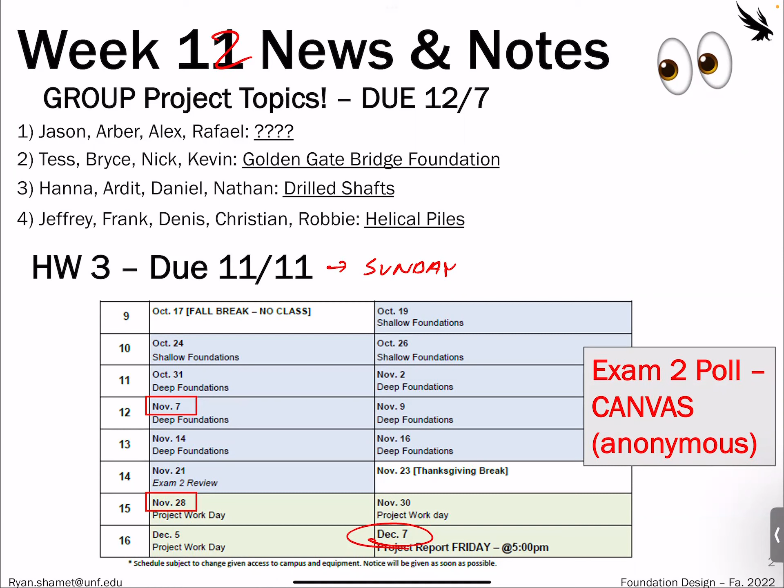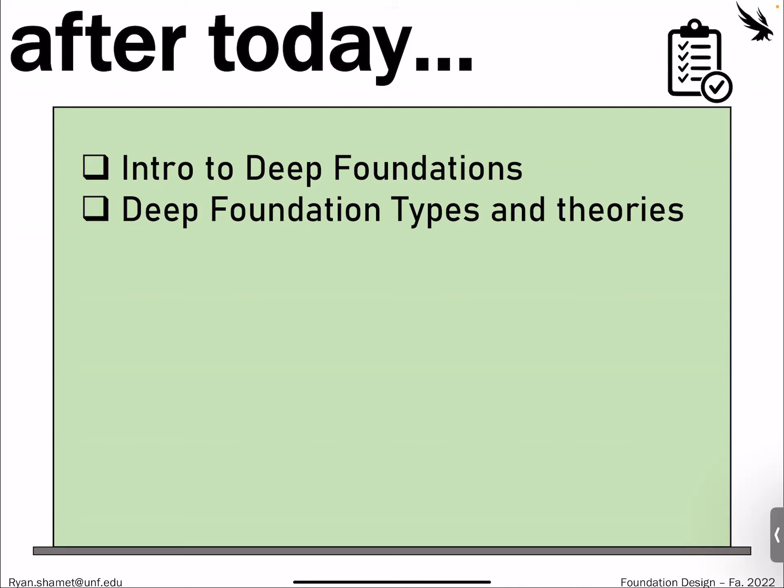Okay, so we're going to introduce deep foundations. Today is going to be a little bit more conceptual. We'll talk about the different types of foundation solutions for piles, and then the different theories based on that. And then we'll get into the fun old equations similar to the bearing capacity equations as before.

Just to recap some things again, for shallow foundations, the capacity or strength we talk about is the bearing capacity. And the way we show this is qu. So although we have input factors based off the shape of the foundation and the depth of the foundation, this lowercase qu is technically a soil strength value. This is the capacity of the soil, the bearing capacity of the soil.

What are the 2 methods that we talked about for bearing capacity? Terzaghi. What's the other one? It's not a guy, it's a super long acronym. Yeah, AASHTO method. Those are the 2 standard theories. The reason I'm choosing these 2, because there's more out there, is that these are the ones provided in your FE handbook and your PE handbook.

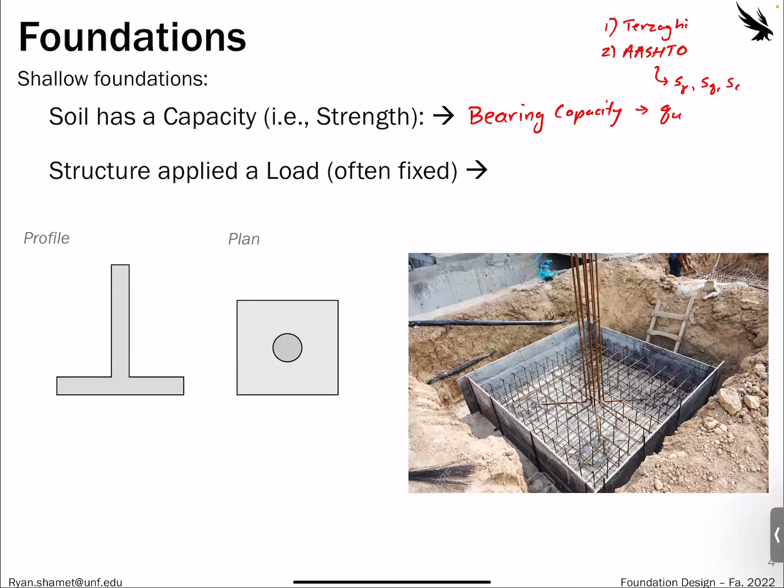So for whatever reason, they use these two. Does anyone remember the difference between the two, or what's the main thing that AASHTO adds? Yeah, shape factors. There's these little S's, like S gamma, SQ, and then SC. So both techniques still look at bearing capacity in terms of three factors: the cohesion, the unit weight, and the surcharge. So there's those three separate factors, and each one has an N, a bearing capacity factor.

These are called bearing capacity factors. The tricky thing is there's Terzaghi bearing capacity factors and AASHTO bearing capacity factors, and both of them still use the same variable, N subscript C. There's a table with N subscript C's for Terzaghi, and there's a table for AASHTO, same variable. So make sure you're choosing the right one.

So we went over an example last class about this. There's two ways you can look at using bearing capacity: you can find the bearing capacity of the soil and then check it against the applied bearing pressure from the foundation, or you could find the bearing pressure from the foundation and then design the value based off of a required loading.

This is like knowing that we have a structure load applied, often fixed, such as capital Q, which is a force. Usually by the time the geotechnical engineer is working on creating this foundation, the superstructure is already pretty much set. The structural engineer knows that the column is going to apply a 100 kip load or something. So then it'll be your job to design the actual footing size, the footprint of it.

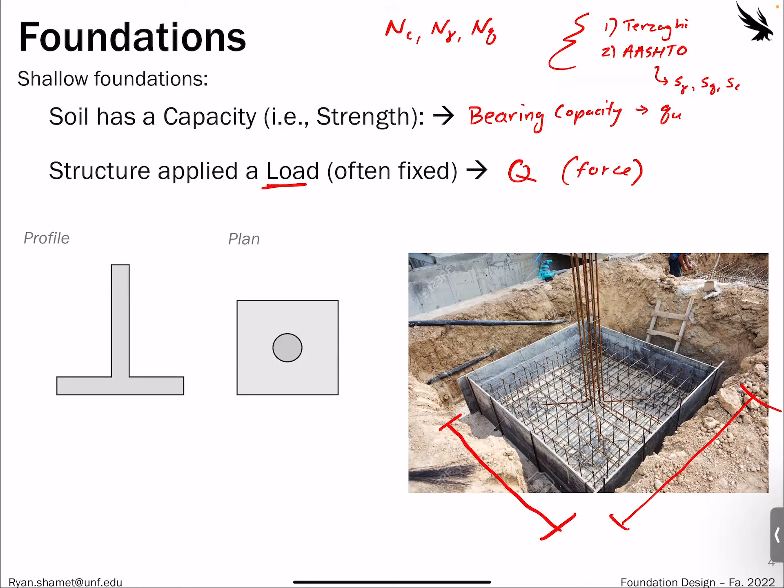So there's different types and sizes of footings, with different footprints. Again, what we're trying to look for is the soil strength, the Q ultimate, to be greater than the applied stress or bearing stress, which would be Q divided by A. So we would find the bearing capacity based off of an assumed shape, length, width, depth, or base. And then we would check that with our applied stress and cross-sectional area to see if that value actually works, and redesign it if it doesn't.

Eventually, though, you'll see there's a point where there's not enough footprint or area available. So you would be calculating the bearing capacity of the soil, and you'd know the Q load and the required cross-sectional area. You could say our site is not large enough to have this footing, and in that case we would need to use a deep foundation. Can anyone else think of another reason why we might need to use a deep foundation over a shallow foundation?

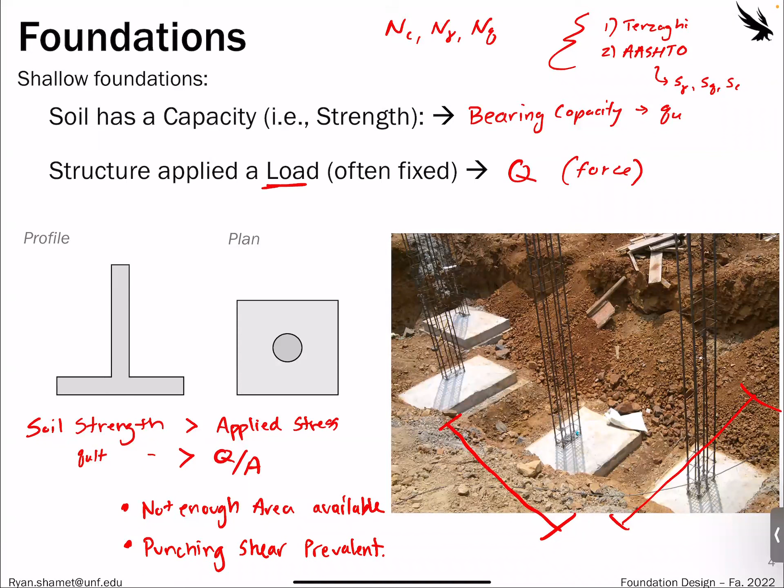The type of soil you have on the very top couple layers. Yeah, you might need to drive it down so you have stronger soil to support the structure. So technically that would be if punching shear was occurring, so punching shear prevalent. If you have a weak soil on top, or low density soil, or undesirable soil like organics, then you would need to push that load to a deeper level.

For that, we use piles, drilled shafts, caissons. These are all types of deep foundations. Essentially, with a deep foundation, a way of characterizing it is just anything that's not a shallow foundation - it's where the depth or length of whatever it is is much greater than the width.

Another way of thinking of this is that instead of transmitting the stress horizontally across the soil, we're transmitting it vertically. The footprint before, that area, is a cross-sectional area of a horizon or plane around the surface. But for a pile foundation, we transfer it vertically through friction and a little bit by end-bearing loads. Most of the time, a shallow foundation is the preferred way for typical structures, and deep foundations require more work, testing, and uncertainty, so they're mainly only used for high importance projects or when soil is really poor.

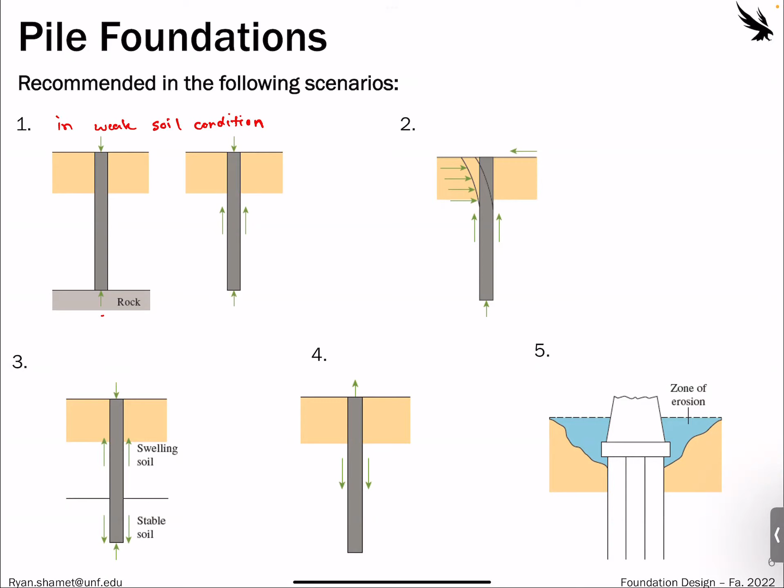So the following are also some recommendations for pile foundations. Not only can the soil be weak, like in weak soil conditions where we need to transfer the loading to a stronger stratum, like rock down below, but pile foundations are also used for carrying lateral loads.

If we're assuming the connections are all rigid, a deep foundation will lower the center of gravity of the entire structure by extending it below ground, so it'll be able to withstand lateral loads a little better and not have as high an overturning moment.

Another reason is expansive or collapsible soils. In some areas in the US, like Texas or Louisiana, there's clay that can swell whenever it becomes wet. During flooding seasons, it can actually push up structures, so a deep foundation is pushed down to more stable soil. That way the soil above it can rise and fall without putting stress on the superstructure and causing tilting.

Another reason might be to resist uplift. This is for tension piles, like helical piles some groups wanted to work with. It's essentially like a screw that resists uplift in case of overturning, similar to tension wires on big cell towers, like the one by Jag Stadium.

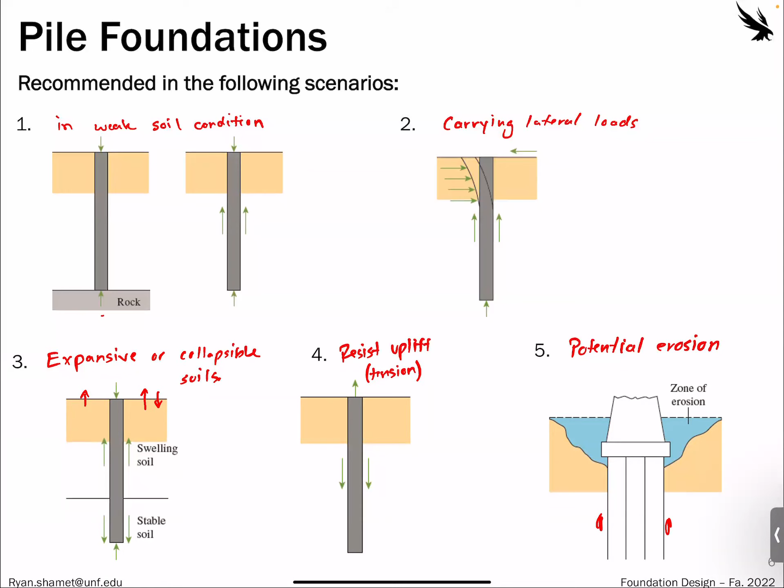Piles can also be used for construction purposes, not just structural loading. One example is soldier pile walls, used for retaining walls. Essentially you have H piles or W members, usually H piles.

That's really helpful because these are also often temporary. These H piles, since they're spaced well together, can be vibrated in and then vibrated out. You install them, stack the wood, and fill it up behind. Whenever you're done with the temporary retaining structure, or switching the road around, you can take the wood down and vibrate the piles out, since they're not as deep as conventional piles.

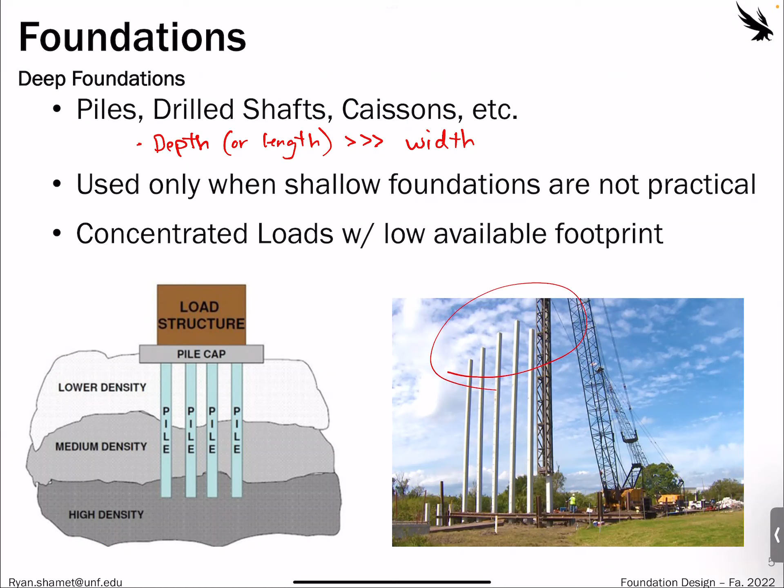This is a video that talks about the pile driving for the I-4 Ultimate project, which is pretty interesting. Most of these pictures are taken from there. They beat the world record pile driving length with spliced piles.

And with the I-4 project and their new project too, that's the Wekiva Parkway project. If you want, you can just Google Wekiva Parkway. Actually, in a couple classes, I'll show some geotech reports for this.

In this area, there were so many potential sinkhole problems with this, where the road was going, that one pile would cap out, like hit limestone at probably 100 feet. And then they'd move over like 10 or 15 feet and the other pile would cap out at like 300 feet. So the deepest single pile in the state of Florida is in Orlando for I-4 Ultimate. I think it was like 440 feet in depth.

Because once they start driving the pile, they're like, alright, we're just going to keep splicing it and keep adding on to it until we reach that resistance value that is designed for. So it can get really expensive really quickly material-wise, because you could design for one thing, but then once you start actually constructing, you have to wait until you reach that actual driving force.

Different types of piles: timber piles, these are just kind of a standard, concrete, steel, and composite. We'll be focusing mainly on concrete and steel, but timber piles you can still come across. Composite piles are now starting to be more popular too, for high strength.

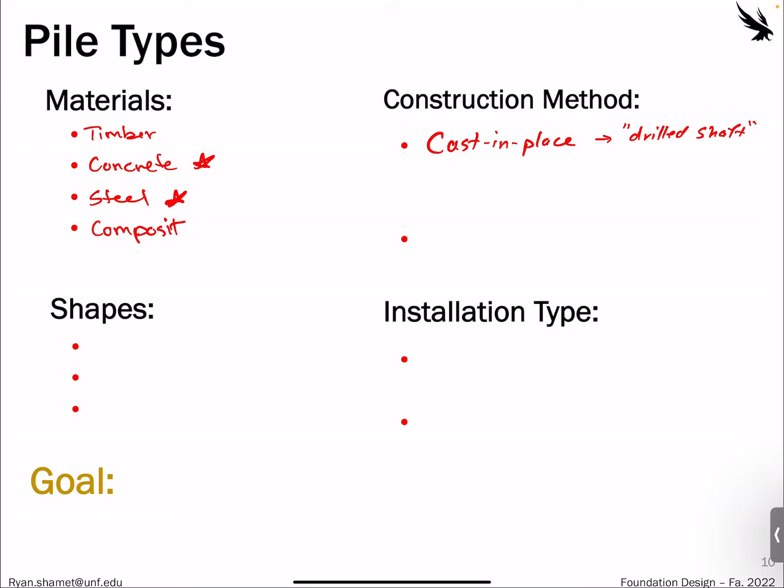So for construction methods, there's different types. There's cast in place. This is usually what we'll refer to as drilled shafts, but depending on who you talk to, some people say it's like a size requirement. Essentially for cast in place, you drill a really deep hole, you put some method of retaining the soil, like mud or some type of casing, then you lower the steel reinforcing rebar into the hole, and then you fill it with concrete. So that's casting in place, you're literally casting the pile in place.

The most common kind is going to be precast. That's the opposite: you're casting the pile beforehand in the yard, at the precast lab or whatever, then bringing the piles on massive semis and installing them at the site. Is there a depth where you switch over from one to the other?

Precasts are better for deeper depths. It's going to be more so loading potential and the soil type too. Cast in place is usually really good for end bearing because they're larger.

Usually the friction is hard to actually design against because you have some type of system to keep the sides of the hole open. For precast piles, you can do designs and make sure that the friction of the concrete or steel is sufficient. So when you're driving it, you're essentially testing the loading as you're driving it, like pushing it in. So precasts are usually for deeper applications.

Or it's like a loading or a soil scenario. So, like you said, in Orlando, a 300 foot drill down - you're not going to have a 300 foot beam. So would they just cast multiple? Would they have multiple beams and then tie them together?

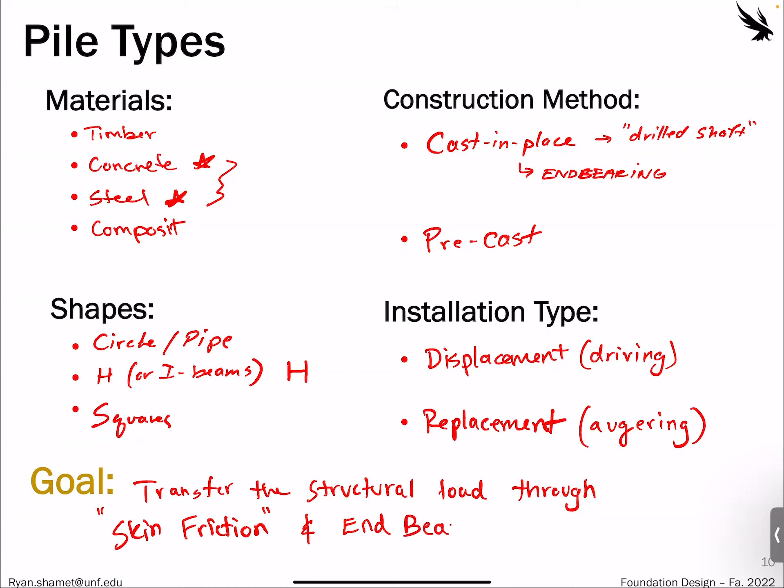So when we start doing calculations here, you'll see most of the time the capacity of the pile is going to be taken from the skin friction - so the actual vertical interface, like if this is the pile, the actual friction along the outside of the pile with the soil. Most of the capacity is going to be that, but there's also some capacity here at the end as well.

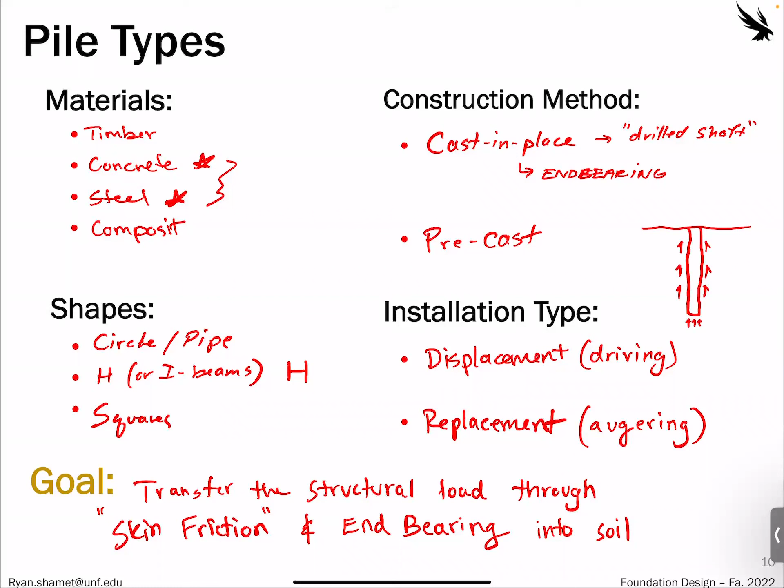Okay, so for steel piles, these are usually, most of the time for structural components, going to be pipe piles or rolled steel H piles. So you can see those are H piles - these can be whatever size you need them to be. Usually this is where drilled shafts are also going to come in, or suction caissons are going to be these as well, like these larger diameter and larger thickness steel piles. Typically for pipe piles like this, we'll use 24-inch pipe piles, which means the outer diameter is 24 inches or 2 feet in diameter - that's like the standard for FDOT.

And the good thing with these is they can be both driven or vibrated in.

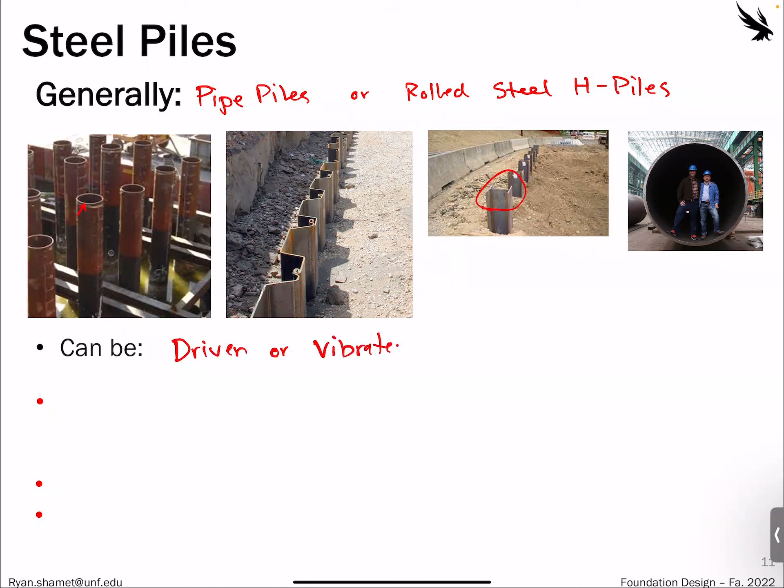So I mentioned before H sections, that's like the structural section here, these H piles. This is preferred over other types of like W sections or I sections. And the main reason is because the web thickness is equal to the flange thickness.

If we remember from mechanics of materials, or if you took steel design, if we have something like this, we would usually call it a W member or wide flange. Your steel manual has all the different section properties. This is going to be the flange, so there's two flanges at the top and bottom, and then the web in the middle. For an H section, that flange thickness is the same as the web thickness.

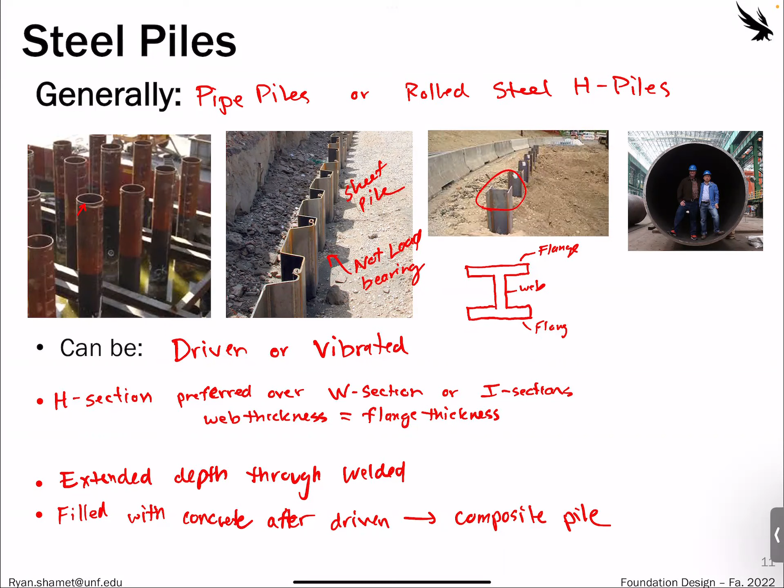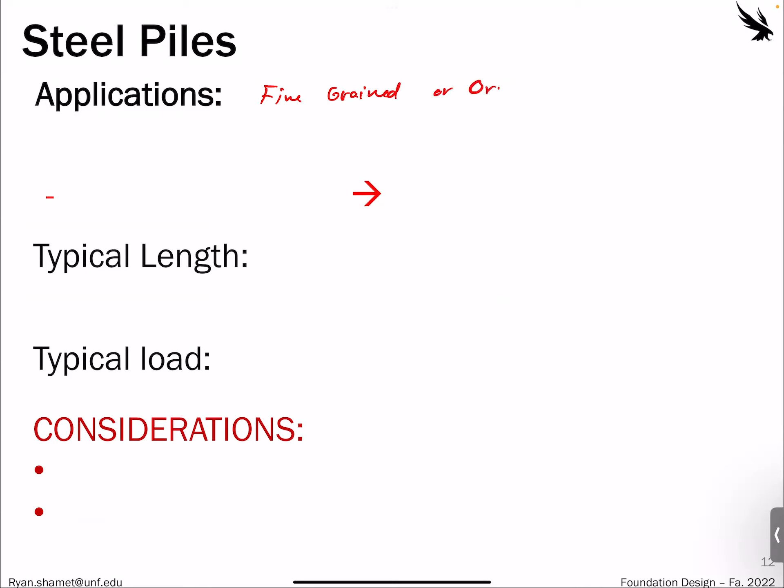So for steel piles, the application, most of the time these will be for fine grained or organic soil. Now it doesn't need to be, but think about it: if you had a sheet of steel and a thing of concrete, which one would be smoother? The steel would be more smooth, right?

There's less friction on steel than there is on concrete, and friction is the thing that we want to be holding a lot of the weight. So fine grained soil is going to be less frictional, more cohesive. The cohesion will actually help bond to the smooth surface of the steel, whereas for concrete, you would want a frictional surface on a frictional soil, like sand or gravel. So that's kind of the rule of thumb when we're talking about piles.

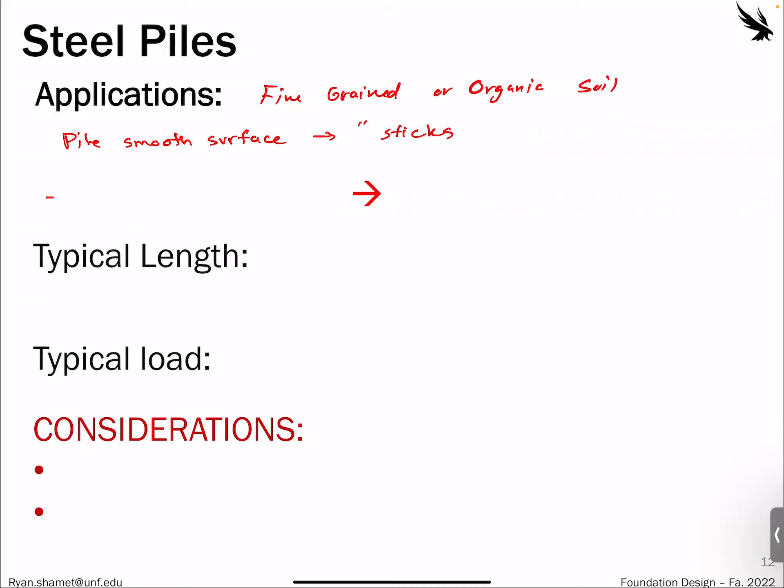For fine grained or organic soils, think of smaller particle sizes that are more governed by cohesion. Then we would want to use a steel pile, because the pile has a smooth surface that essentially sticks to clays or silts, because of the cohesion within that.

So the typical length can be anywhere from 15 to 60 meters, or about 50 to 200 feet.

But when I was working on I4 Ultimate with Terracon, there were some that we were designing up to like 350 feet. We knew, like at Ivanhoe, they were going to be at least that long. There's been some that are 400 feet, as you can splice them.

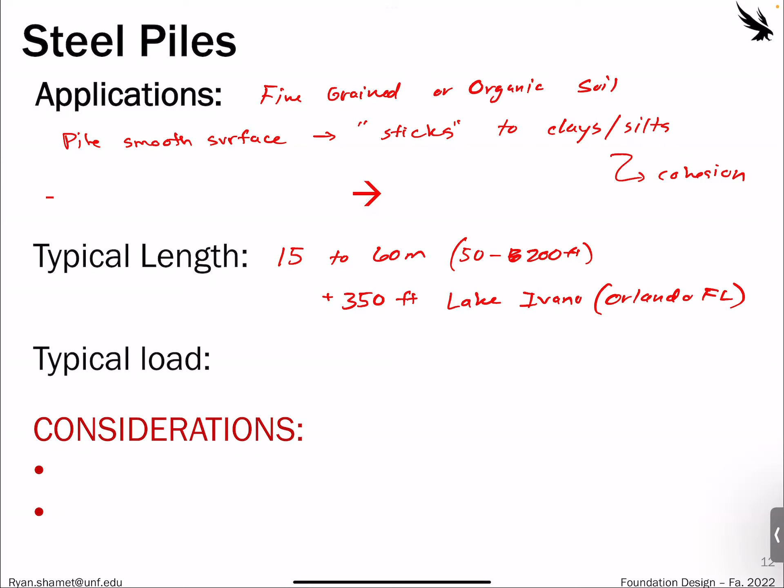Really, really deep piles, especially in Orlando or Tampa, where you have these old lakes that have been around for decades and centuries of organic soil getting piled up inside these lakes. You have to go through all that organic soil to reach the limestone.

Typical loads are kind of whatever, super dependent on the depth in the soil - maybe 300 to 1200 kilonewtons, but it's going to be dependent on the driving technique, the soil, and the size. Typically, vibrated piles are going to be less capacity because you're not able to penetrate into the depth of the soil as much as with a driven pile.

Things we have to think about for steel piles - can anyone think of potential issues using steel piles? Salt, acidity of the soil - yeah, huge, right? Corrosion, everything. Which also makes it tricky because pipe piles and steel piles are really helpful in organic soil. Organic soil is going to be slightly acidic, so you have to treat and ensure you're using the correct type of pile, or push it past the organic soil, so you don't have future corrosion issues.

So usually anything with a pH less than 7.

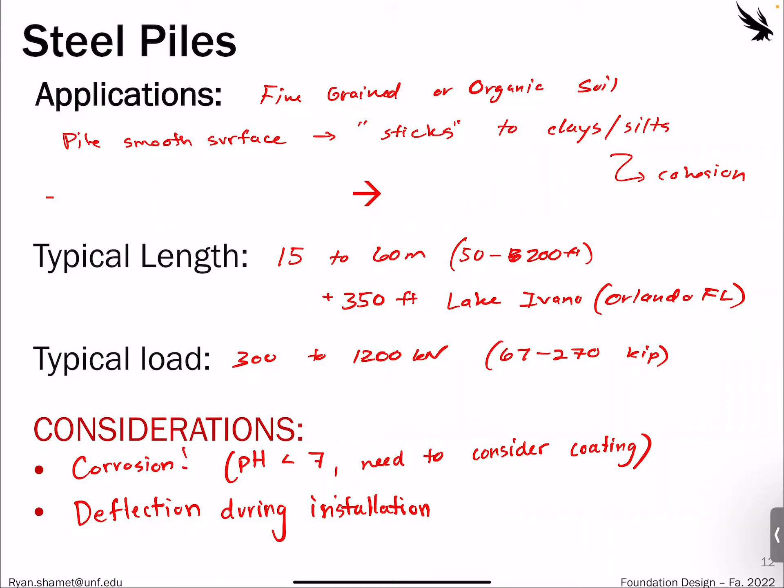Anything else, especially for driven piles, like these piles that are hammered into the ground? Yeah, deflection or deformation. They're not rigid, especially some of these thin little pipe piles, so deflection during installation. Because what's happening underground you usually can't even see, right? You're driving this pile and all you see is it going down, and you think it should be hitting some bearing or rock layer at this depth, but really the pile is moving sideways or deflected and you can't tell. You can actually get buckled ends of the pipe piles while it's being driven. So you need to ensure that the hammer driving the pile isn't hitting it too hard, buckling the pipe up, or that it's pushing through if it hits an underground utility or something, so you're not breaking the pile that way.

So the issue with this is it's unknown to the contractor, right? Because all they see is the pile going into the ground.

One of the examples is Lake Ivanhoe, that I already talked about, where we had all these deep piles. This bridge is finished now, right by north of downtown Orlando. But we lost, I think, a couple hundred-foot pipe piles, which means they were driving them into the ground and it wasn't hitting the rock they thought it was, and it was bending over, so they couldn't keep driving them. They just pushed it in the ground, moved over, and installed a new one. So there are these massive bent pipes underground forever, essentially. That happens a lot in Florida, actually. We'll let the future people, the aliens, worry about that.

There's another example, I couldn't find the picture, but I remember in my class they showed this too. It was an H pile they were driving into the ground, and it was bending at the perfect radius where it never buckled, and they kept driving it, and it poked up through a house down the street, because it was just driving at that perfect radius. So you always have to consider that. You want the pile to be stiff enough to drive, but not too stiff that it's too hard to drive, or you can't vibrate it in.

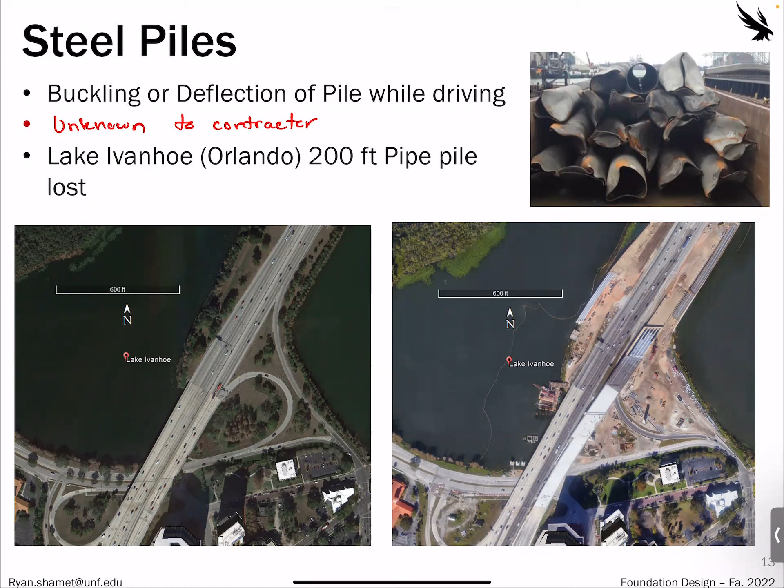So that's the issue with steel pipe piles, or steel piles in general.

So that's one of the pictures, you can actually see the pile grouping there. These were all down to like, I think, 300-foot piles. When you're driving on the side of the road and you see these piles, you'll see numbers as they're being installed, that's the length of the pile. The contractor will do that when they're splicing them together. So if you see like 200 at the top of the pile, that's not the pile number, that's the depth or length of the pile underneath. Always in feet.

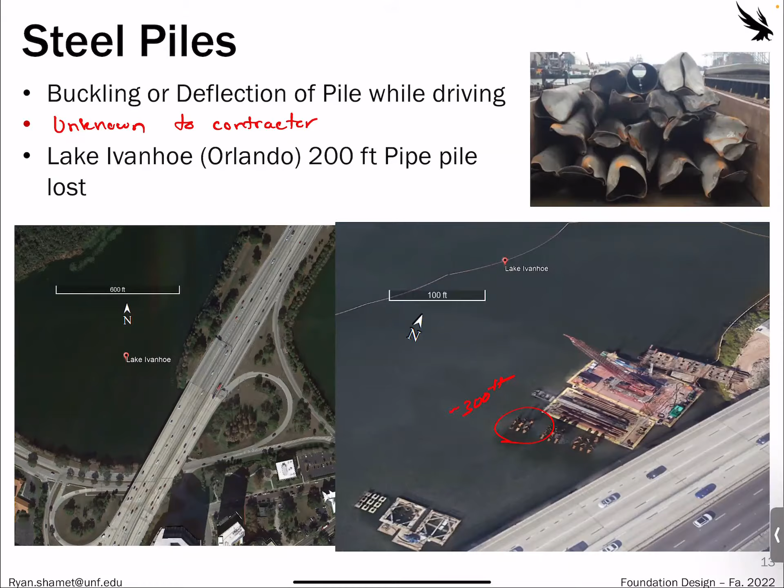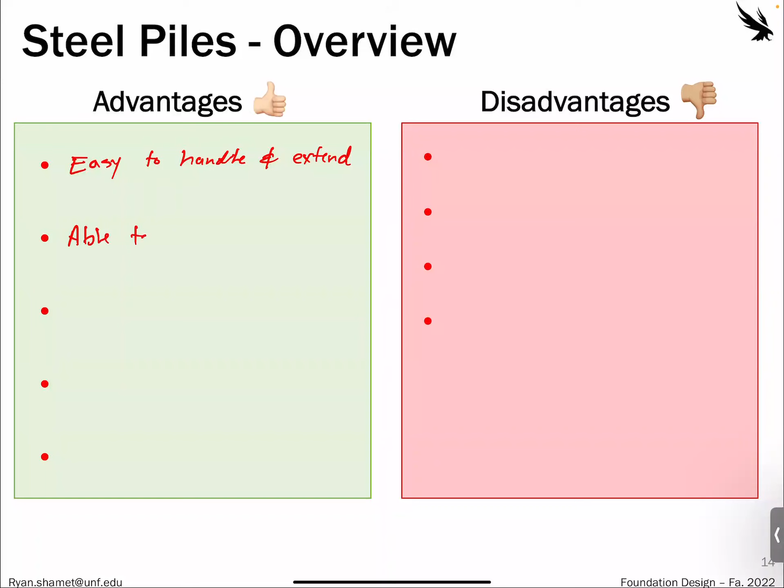So the advantages: they're easy to handle and extend. As far as transporting, they're massive pipes, and although they're hard for us to pick up, they're lighter relative to massive concrete structures, since there's lower density, less amount of material. They can be vibrated in, which is really helpful compared to driving piles, since concrete piles can only be driven in. So steel piles allow us to just vibrate them in.

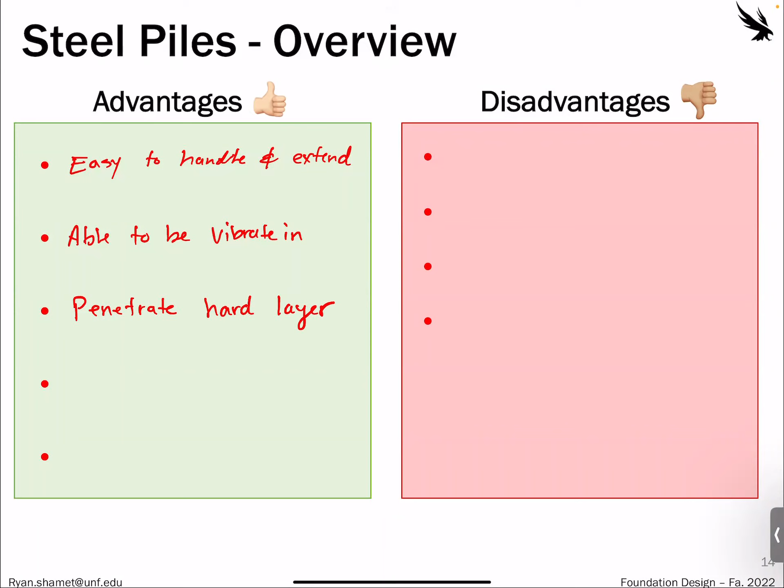As far as compared to timber piles, steel piles can still penetrate hard layers. For the most part, steel's pretty strong as long as you are carefully driving them with not too much force.

They have adaptable geometry. Some steel pipe piles can actually be tapered, where they're smaller at the bottom to help with that driving, and then help activate the friction a little bit more. And they can still have a high load carrying capacity.

So some of the disadvantages: they can be pretty costly because you're using a lot of steel.

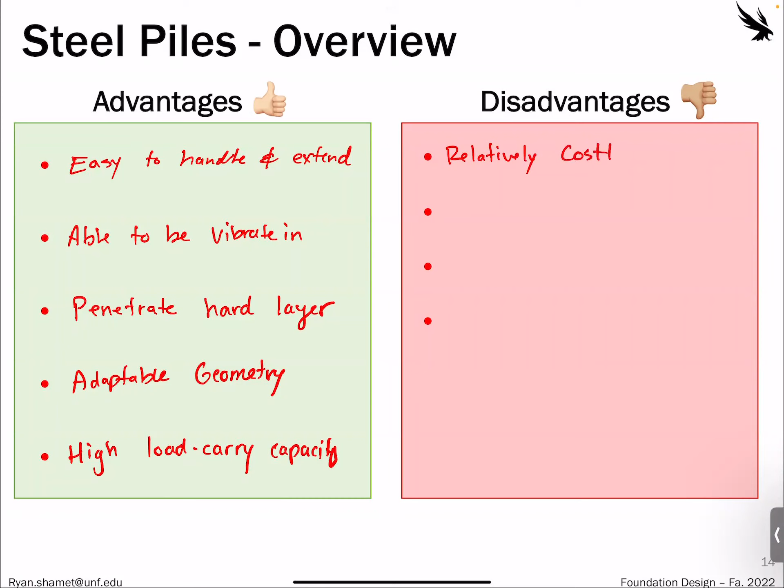If you are driving them into the ground, then it's very loud. So the contractor, especially in residential areas or in business districts, they might have to consider that and not drive too early or too late, or near an assisted living facility or other sensitive areas, you might not be able to drive piles there because of the loud sound.

Corrosion is a big issue too, a disadvantage with these, but nowadays we can do different painting or different coating, but that can essentially cut down the friction.

And then there's driven deflection, for like if you hit a hard layer that's unexpected, an obstacle underground, or if the hammer energy is too high.

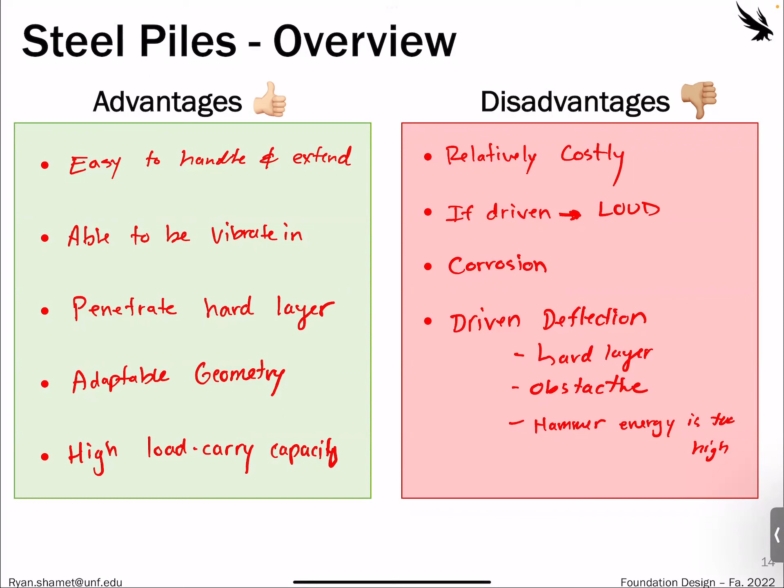So, concrete piles, as I said before, these are precast or cast in situ piles, also called cast in place piles. And these are usually called drilled shafts.

The main thing with concrete piles is these must be driven. They cannot be vibrated in. They're all driven piles. So a lot of structural aspects have to go into designing these.

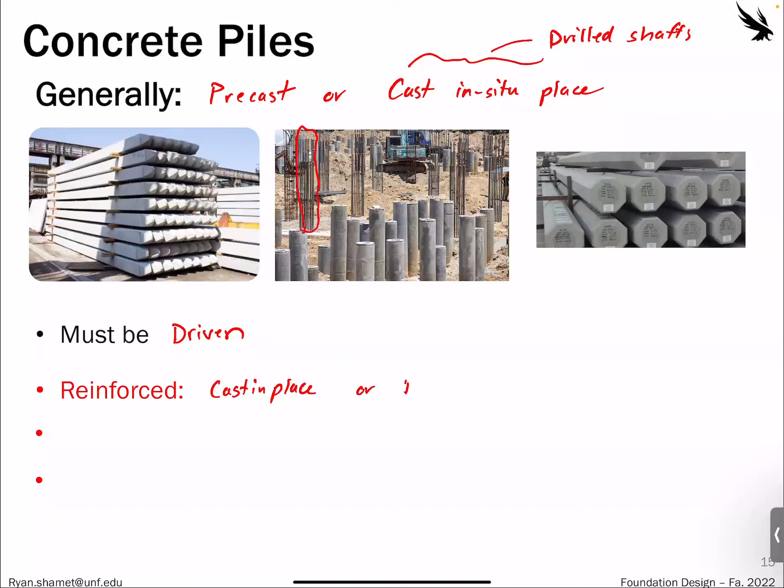They can either be cast in place - this is where you lower the rebar and then you cast the concrete piles like this here - or they could be what's called post-tension or pre-tension.

And these are to add capacity to the piles. Did anyone go to the Gate Precast field trip with Dr. Al-Safdi? I don't remember if they actually do piles or not, but most of them are going to be precast piles that will be pre-tensioned, like pre-tension strands.

So to extend the depth, you have to do it through splicing, which is kind of a pain. Essentially, when you splice, you're creating a point of weakness, a point of discontinuity in the pile. It's not like steel where the weld just essentially makes it act as a consistent pile.

So just like reinforcing concrete, they're all going to be reinforced concrete. You would never have just a normal pile with only concrete - it's always going to be reinforced. Because you're essentially designing a beam, and even though it is mostly going to be vertical, there can still be eccentric loading, so you have to make sure the pile can still withstand some type of bending. So you have to include reinforcing.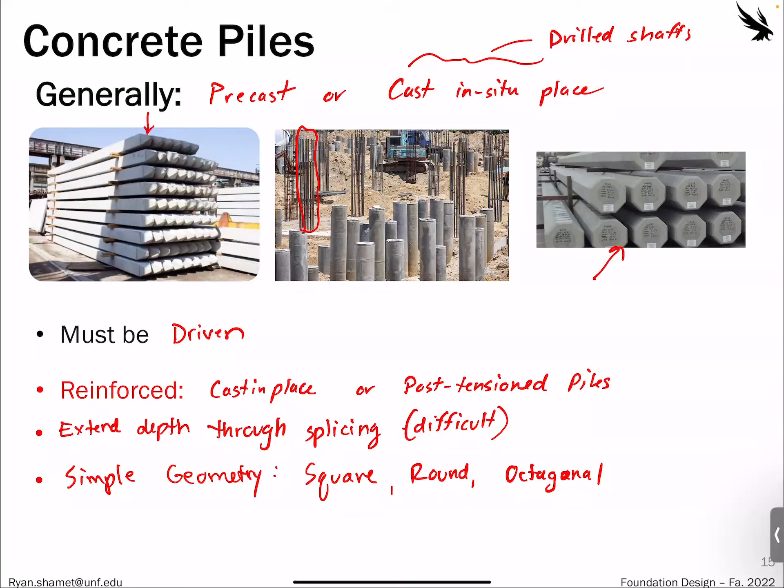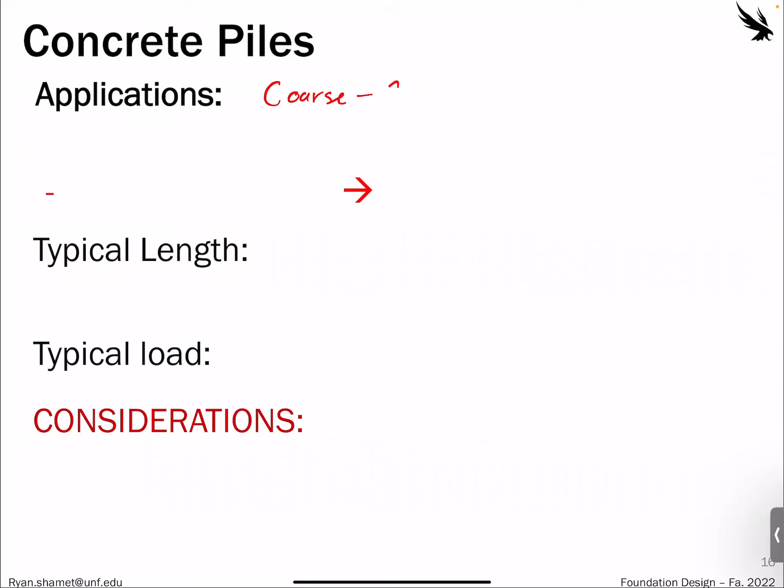The applications for these are going to be most of the time coarse grained soil, so sand or gravel. The whole reason is the pile has a rough surface, so it grips the sand through friction - like sandpaper on sandpaper, it has that frictional resistance. Or if you had sandpaper on clay, you would just kind of be shearing it.

So the length is very similar, like 10 to 60 meters, so it's like 30 to 200 feet. Usually 30 feet would be like the minimum pile - you would never really design a pile less than 30 feet for these concrete piles, just because you would need to transport it and all that stuff. So for concrete, 30 is usually the minimum.

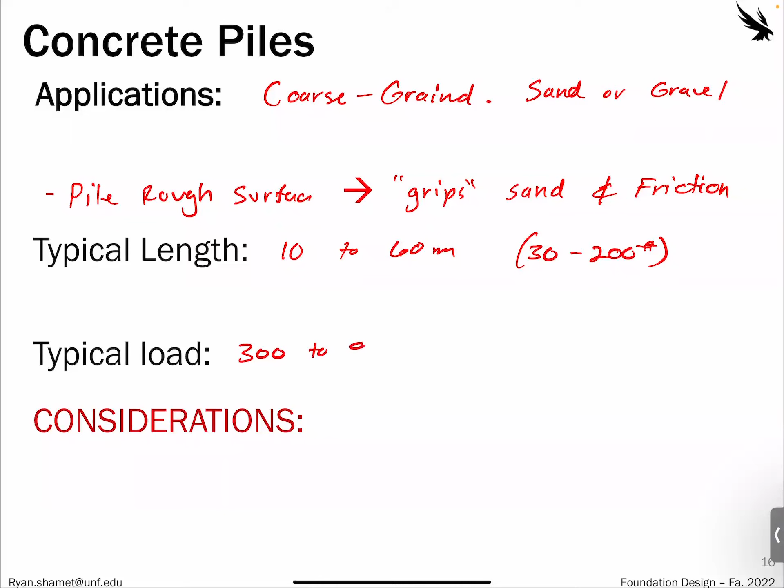And then you could continue splicing them up similarly to the steel, but you still have limitations. For typical loads, the loading is larger than steel piles usually - the main reason is because you can drive these deeper into harder soil. Eventually, if you keep hitting the steel, it'll either buckle or bend. So the deeper it needs to go into a harder layer for more resistance, with concrete we just have the hammers set up so we can hit them harder and they can actually go deeper or into a harder layer so we can get a typical higher loading resistance.

With that though, there's still a couple of considerations. The main one is the weight of the pile. You have to be careful because if you add too much weight on a pile, over time it can creep and settle. If you think about it, you're adding like a 100-foot concrete column, and although when installing it you usually install it till it doesn't go any further, that 100-foot tall column is really heavy and could slowly settle, causing cracking or tilting of the structure, since it's a long-term dead load. So the weight of the pile needs to be considered.

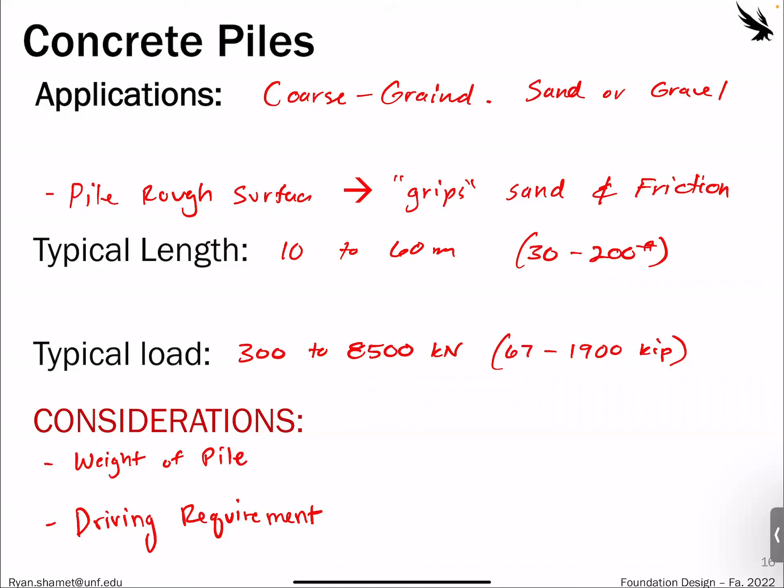Transportation is also usually harder. The other consideration is driving requirements too. They're usually harder to drive than a steel pile, which is good because that results in higher capacity, but you need to ensure you're using more energy and the correct type of hammer to install those types of piles.

So advantages, and this is mainly compared to steel: they're more economical. You can actually find or produce the exact length if this is a cast-in-place concrete pile. So if you know there's a bearing layer 18 feet below your structure, you just drill down to 18 feet and pour concrete and there's your pile. You don't have to worry about cutting or welding, because oftentimes steel pipe piles or precast concrete piles just come in a standard length.

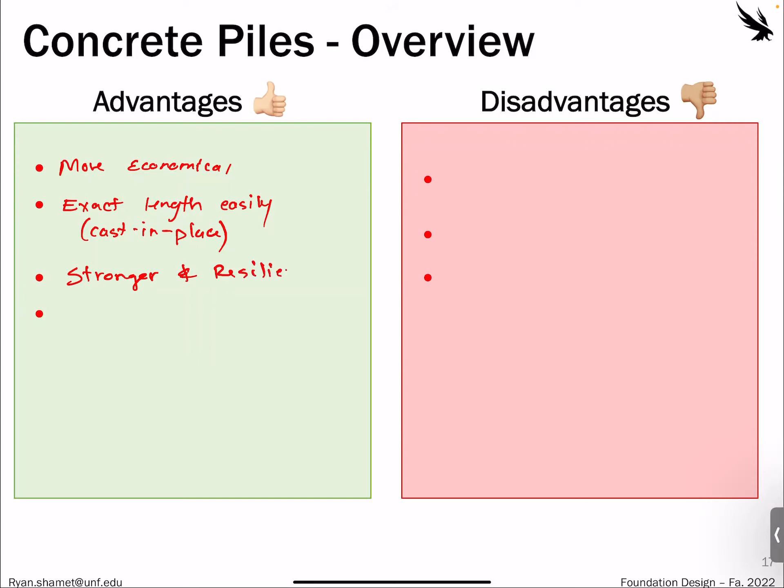They are more stronger and more resilient. Concrete is just more resilient long-term against corrosion and other aspects than steel and than timber. So they'll last a little bit longer.

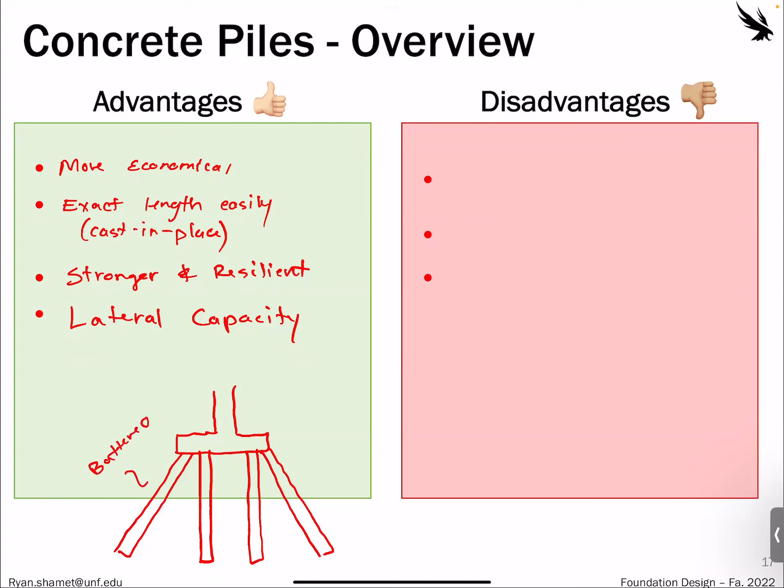They're also much better in lateral capacity. That's why for concrete piles, they can be battered. Has anyone heard the term battered piles before? You've probably all seen them, a lot on bridges. This is our pile cap, you might have some piles installed vertical like this, but you could also have battered piles, which means they're installed at an angle. This helps, especially in Florida, against wave action. So a lot of bridges that go over bodies of water will have these lateral or battered piles that help against lateral loading. Pipe piles usually don't get as much of this because they're harder to install at an angle like that without them bending. So concrete piles are really good for lateral capacities.

Some of the disadvantages: they can only be driven, so they can't be vibrated in. In sensitive areas, you're going to be hearing a hammer hit the pile all day. So inside cities, people don't like them.

The transportation can be a pain. We'll show some pictures of these later on too. Some of these piles for the I-4 Ultimate, they had to transport these piles within a certain time at night because they literally had to shut down a whole highway, I-4, the existing road, because they'll be like 2 semi-trailers back to back with an extension since they were so long. So the transportation, the logistics of getting a super long, heavy concrete pile from the precast yard to your project site needs to be considered.

And then, yeah, the splicing to connect, so the connection points are weak. That's why usually we'll try to precast them to the required length. They could be up to 60 feet, but then you have to worry about the transportation. So there's just all these other little things. Pipe piles can just be stacked on the bed of a truck in 30-foot increments and then welded together as they're being installed.

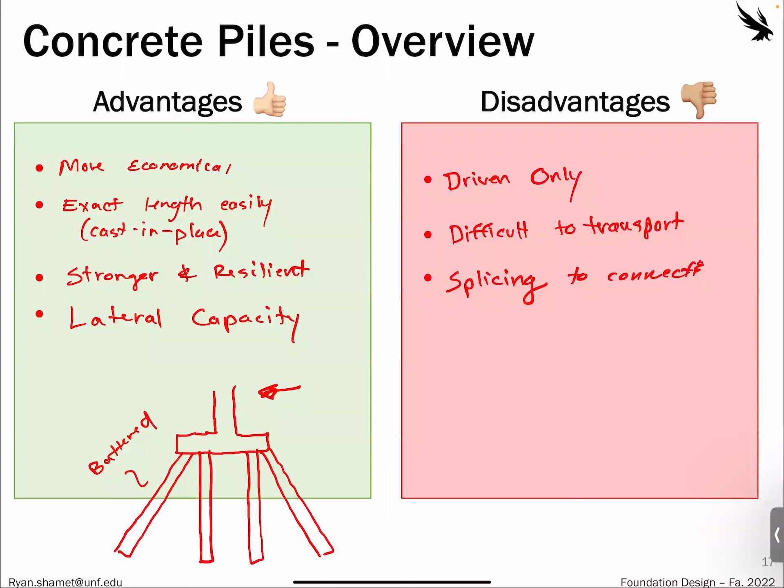All right, and then just for fun, timber piles. These are the cheapest, so you would use these for residential, city, docks, or temporary structures. I've personally never done anything with the design aspect of timber piles, but you might still come across it. These can be driven or pushed in, which is kind of nice, so they can actually just be hydraulically pushed into the ground. There's these different classes of timber piles you might come across: Class A, Class B, Class C.

They'll install it and then put rock or something to stabilize the ground a little bit. Most of the time they'll either drive these into the ground and just forget about them, or they'll pull them back up, because if they're not treated, they're not going to last very long. So for driving, it's obviously limited—you can't drive it to a high capacity because the wood will shatter or broom.

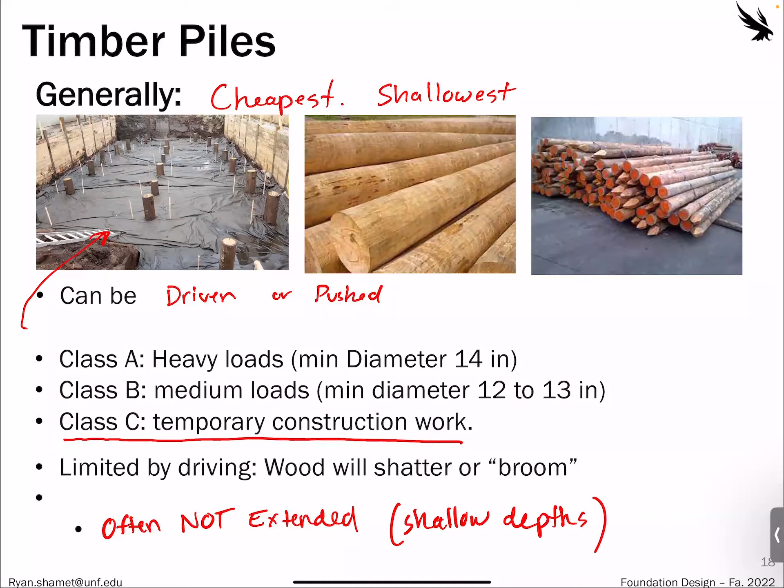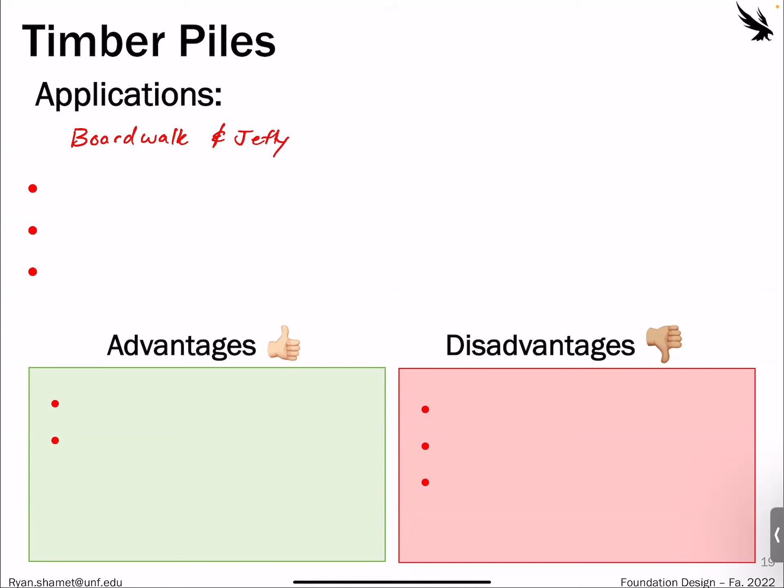Applications mainly are going to be like for boardwalks or non-heavy loading. Some jetties, but usually not like lake or coastal jetties.

And the interesting thing is these are actually favorable in aggressive soil conditions. The good thing is, even though we think wood will rot, that's because a lot of times we just use cheap wood that's imported in. But if you use local trees like cypress or other things actually growing in that area, and make piles out of them, especially cypress, then it's going to have a natural coating so it doesn't become rotten underwater. So you can actually use these in aggressive areas, because if the trees are growing in high organics, high sulfates, or even salt conditions, then usually the wood's going to be a little bit more resilient than steel. So you could use this in aggressive areas as long as you're keeping it local to the actual type of tree and type of wood.

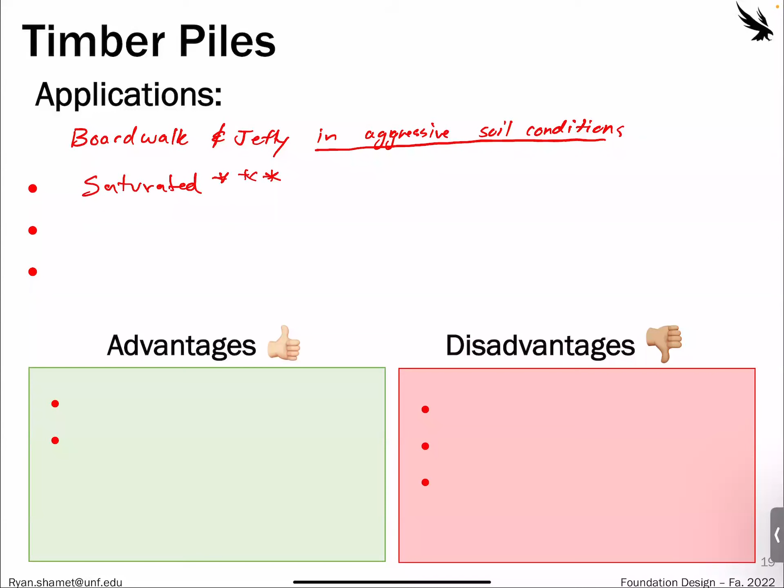Some of these aggressive areas could be saturated soil conditions, usually like salt saturated, under swamps or something, and other things like organic and marine. But again, they're heavily limited by the loading capacity. So you either have to have the spacing really close together, or use larger diameter ones that are just for walkways, like wooden walkways or boardwalks.

So for advantages, they are the most economical as far as production of piles—they're the cheapest. And also they can actually last the longest in the right conditions. So you have to choose the wood wisely and use the right pre-treating procedures, but wood will last pretty long.

Disadvantages: low loading, shallow, and of course if you mess up the application or use the wrong type of wood, then they can biodegrade if not designed right.

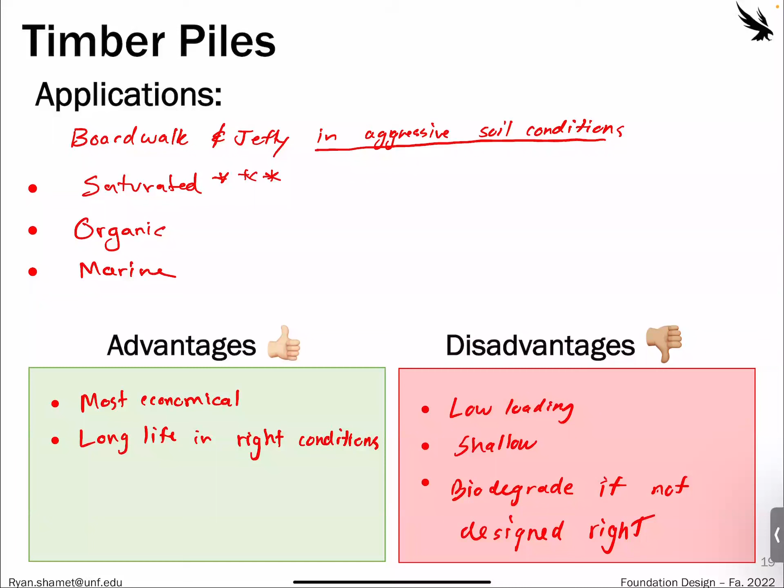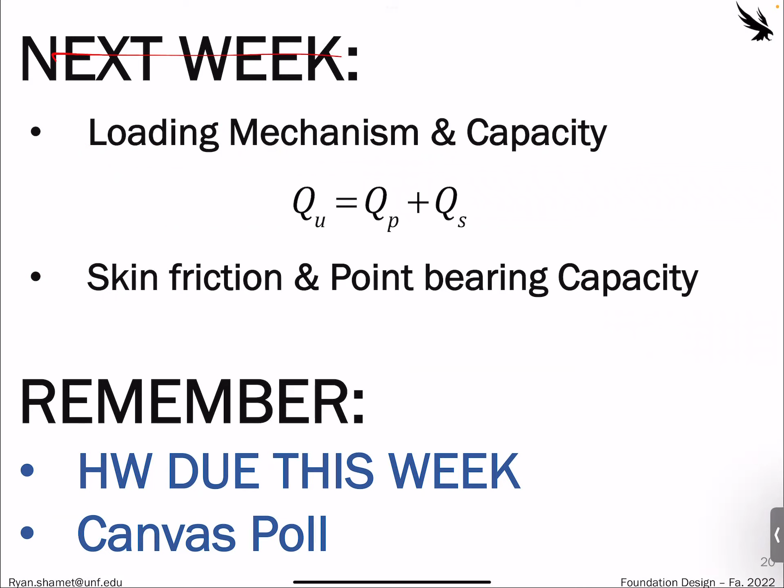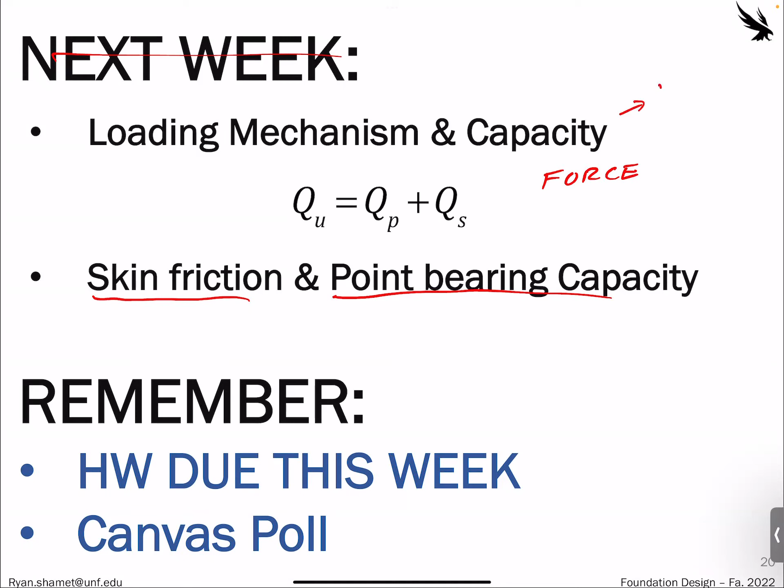I think that was it. Okay, so we'll talk about the loading mechanism next class. I already kind of hinted at this, but it's a combination of what's called skin friction, QS, and point bearing capacity, QP. Since these are upper case, these are all forces, so we kind of have to think oppositely here—we're not designing a stress like the bearing capacity is, we're designing forces. These capacities will all be as a force, usually in kip or kilonewton.